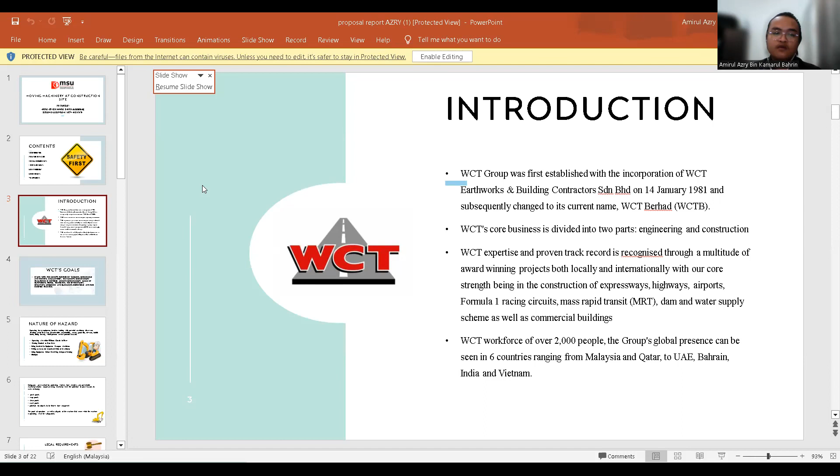For WCT goals, in line with the group's purpose of building sustainability and thriving communities, WCT Group Sustainability Framework is centered around the sustainability goals of empowering people, protecting the environment, enhancing livelihood, and embracing responsible and fair business practice.

Operating heavy equipment involves working with powerful machinery: excavator, backhoe, mini excavator, mobile crane, forklift, goods lift, elevator, truck, lifting beam, which present several potential hazards.

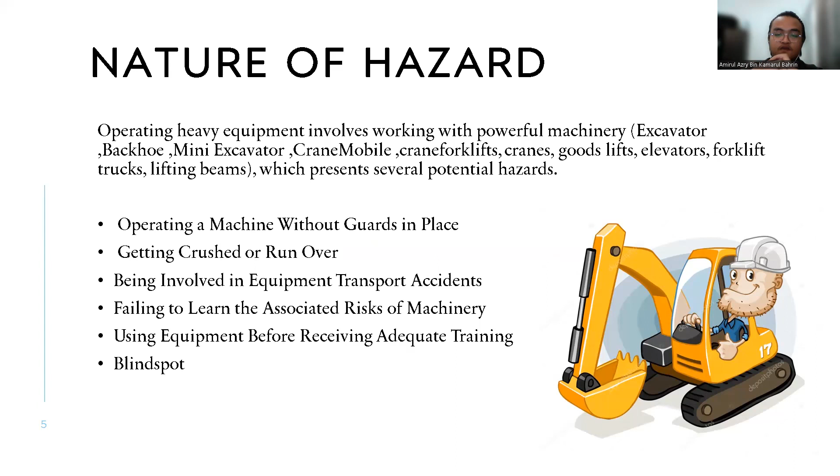These include operating a machine without a guard in place, getting crushed or run over, being involved in an equipment transport incident, failing to learn about the associated risks of machinery, using equipment before receiving adequate training, and the last one is blind spots.

Legal requirement: Factory and Machinery Act 1967, an act to provide for the control of factories with respect to matters relating to the safety, health, and welfare of persons therein, the registration and inspection of machinery, and for matters connected therewith.

Occupational Safety and Health Act 1994, an act to make further provision for securing the safety, health, and welfare of persons at work, for protecting others against risk to safety or health in connection with the activities of persons at work, to establish the National Council for Occupational Safety and Health, and for matters connected therewith.

Research goal - research questions: What is the daily routine of heavy machinery operators before operating machinery in traffic areas? What sort of accidents do employees frequently sustain when working with heavy machinery? And also, the last one is, what factors cause accidents to occur in the machinery handling area?

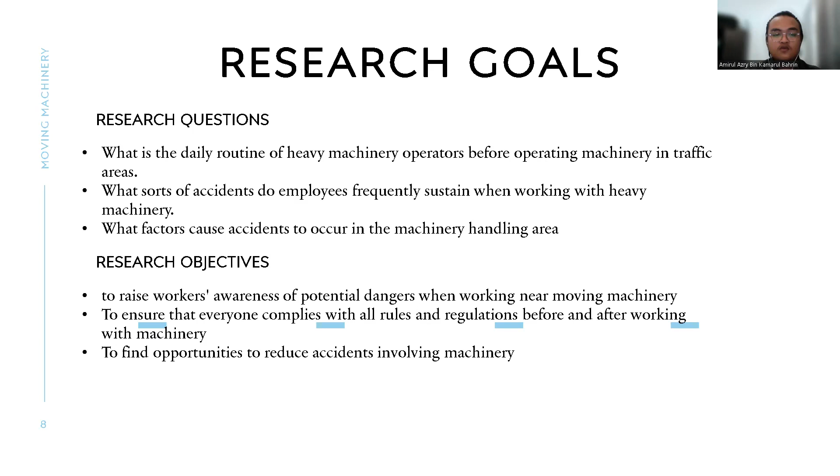For the objectives: number one is to raise workers' awareness of potential danger when working near moving machinery. Second, to ensure that everyone complies with all rules and regulations before and after working with machinery. And the last one is to find opportunities to reduce accidents involving machinery.

Scope of study and significance of study. This study focuses on the safety of workers when the machinery is on duty. This study was conducted through interviews and observation at LRT 3 Site Station 5 during my 5 months here. The observation made here is on the operator's routine before and after operating their machinery, and how they prevent people around from working near the machinery on duty.

This study was done to make contractors and subcontractors aware that it is important not to approach and to keep a distance from machinery that is on duty, for the safety of the workers.

This study is also to find out how to work more safely when using machinery and to keep the safety of people around. In addition, this study is also expected to reduce the risk to workers and open their eyes to know how many dangers there are when working with moving machinery.

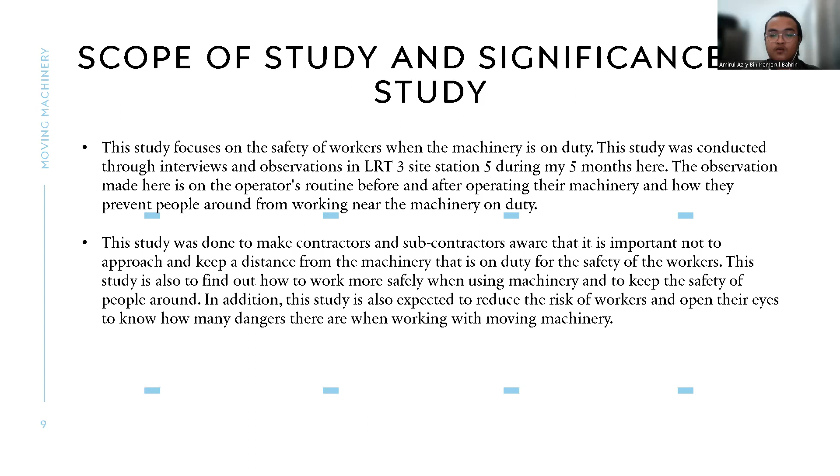Hazard identification method. Hazard identification is one of the essential elements of the health and safety management system. Hazard identification, also known as HAZID, is the process of finding hazards and is the foundation for developing safe work procedures. It is the first step in the risk assessment process, and it identifies the source and cause of hazard.

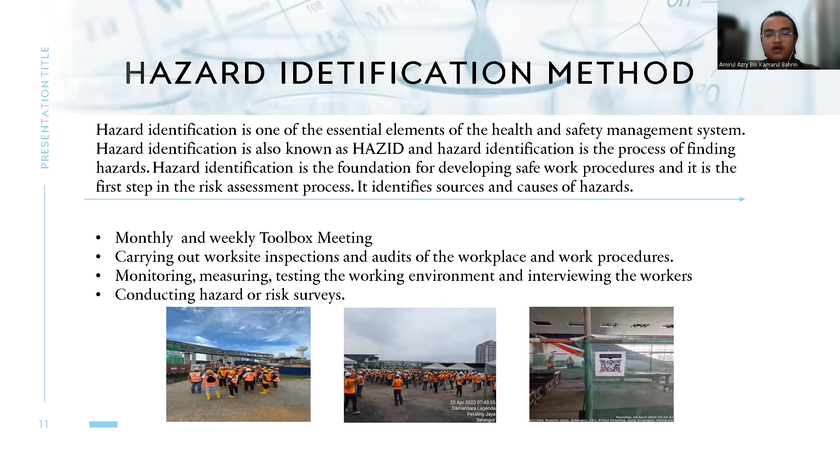First is monthly and weekly toolbox meetings, and then we carry out work site inspection and audit of the workplace and work procedures. Then we do monitoring, measuring, and testing the working environment, and interviewing the workers. The last one is conducting a hazard or risk survey.

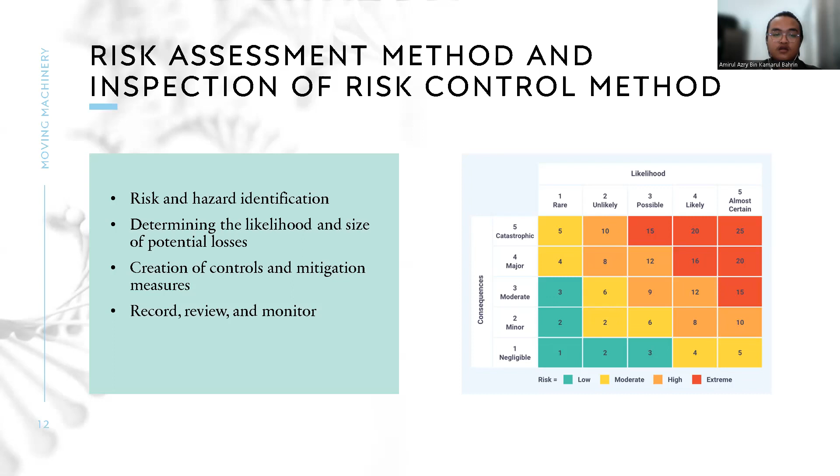The risk assessment and inspection of risk control method involves risk and hazard identification, determining the likelihood and size of potential loss, creation of control and mitigation measures, and record review and monitoring. This is an example of the table.

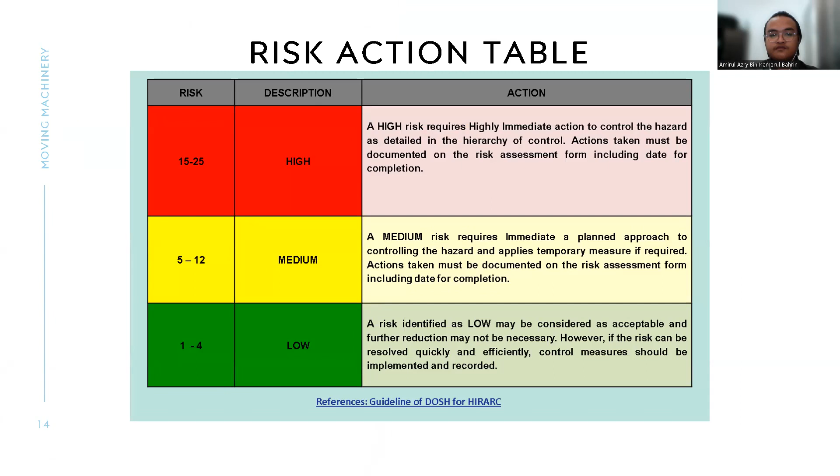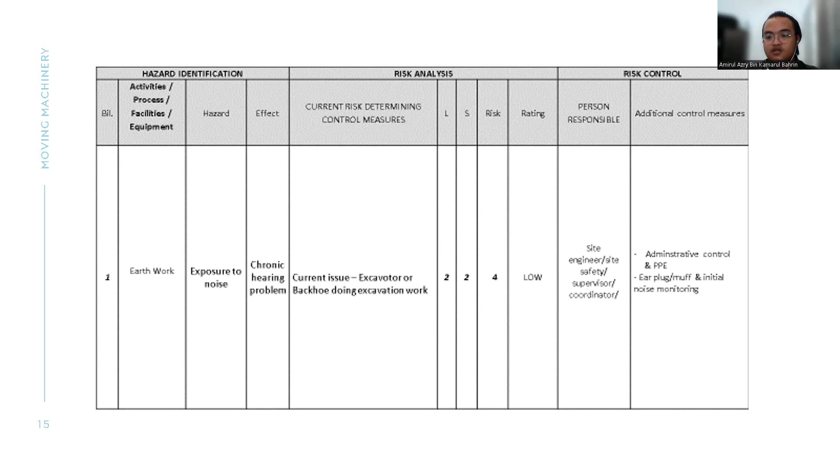This is the risk action table. First, earthwork: the hazard is exposure to noise, with the effect being chronic hearing problems. Current risk control measure is excavator or backhoe doing excavation work. We put 2, 2, and 4, with the rating low. Person responsible is site engineer, site safety supervisor, and coordinator. Additional control measures are administrative control and PPE, providing earplugs and initial noise monitoring. Okay, we go back here, work it first.

Number 2 is box culvert and similar work. Hazard is inhalation of dust and concrete dust, with effect being irritation of respiratory system. Current risk control measure addresses inhalation of dust while doing excavation work. We put 3, 1, 3, with rating low. Person responsible is site engineer, site safety supervisor, and coordinator. Additional control measure is wearing PPE, mask, and respirator.

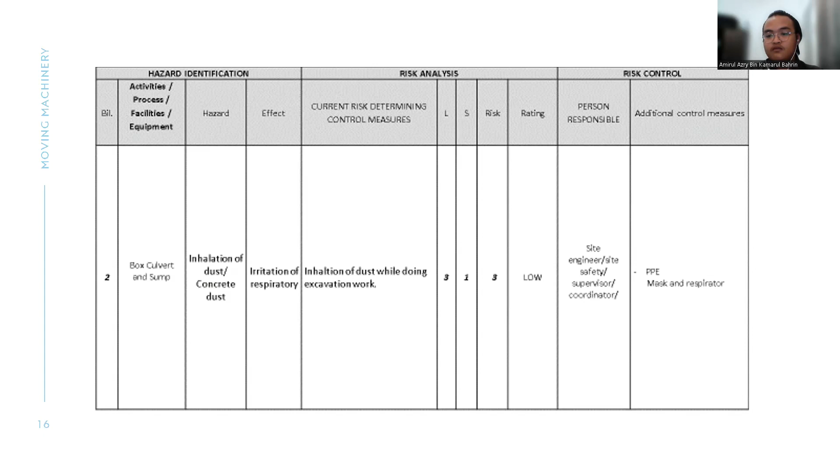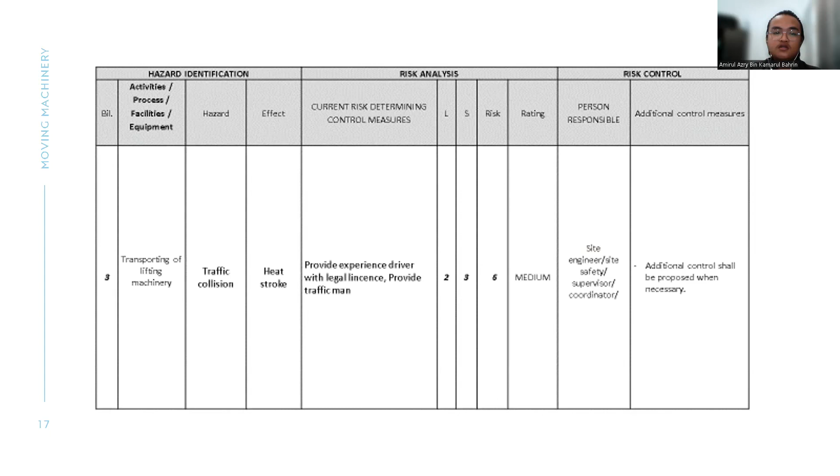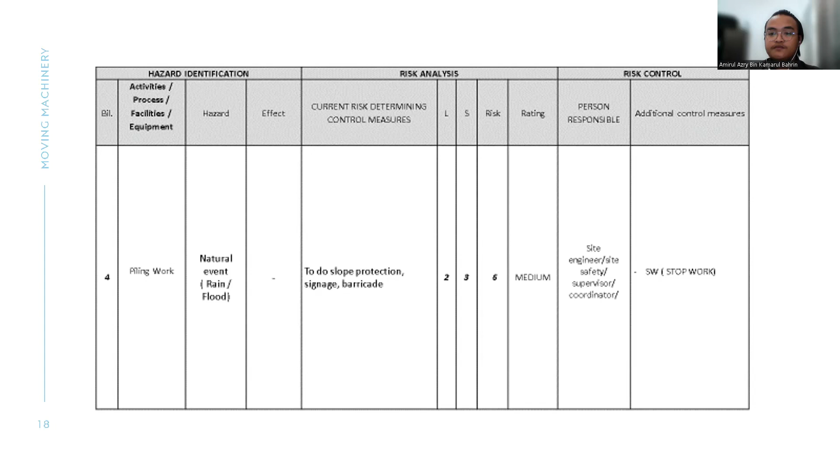Number 4 is piling work. The hazard is natural events, rain and flood. The effect is none directly, but current risk control measure is to do slope protection, signage, and barricade. The effect is actually to people around, so they might fall or get sick from it. We put 2, 3, and 6, with rating medium. Person responsible is site engineer, site safety supervisor, and coordinator. Additional control measure is to stop work.

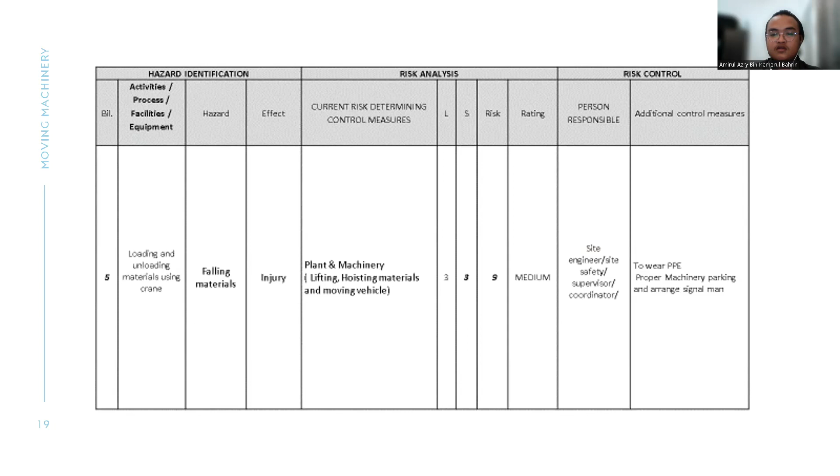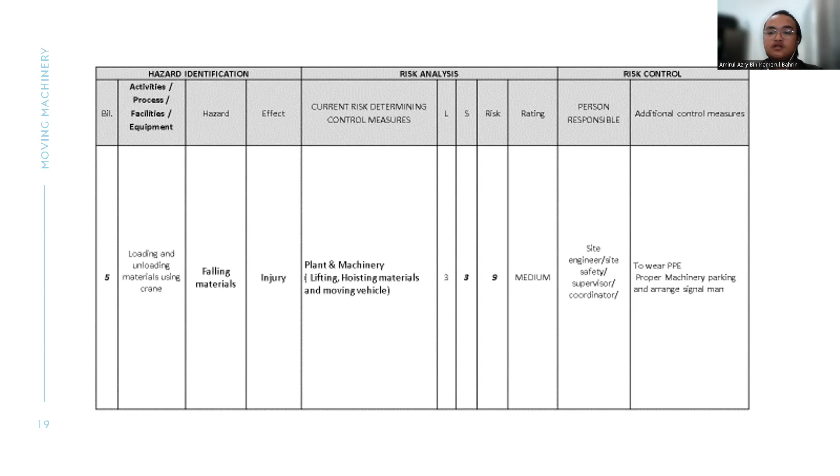The last one is loading and unloading material using a crane. The hazard is falling material, with effect being injury. Current risk control measure concerns the plant and machinery, lifting, hoisting material, and moving vehicles. We put 3, 3, and 9, and I guess rating is medium. Person responsible is site engineer, site safety supervisor, and coordinator. Additional control measure is to wear PPE, proper machinery parking, and arrange a signalman.